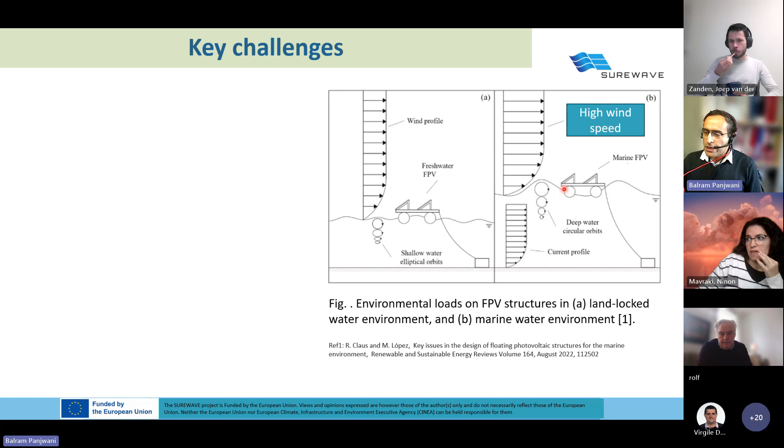You have extreme environmental events, constant fatigue on the joints and connections, salt water corrosion and UV degradation, biofouling, and this constant movement of the FPV modules and the breakwater could result in micro cracking and misalignment. Also, since these technologies are at low TRL, there are normally no well-established design standards, guidelines, and legal regulations.

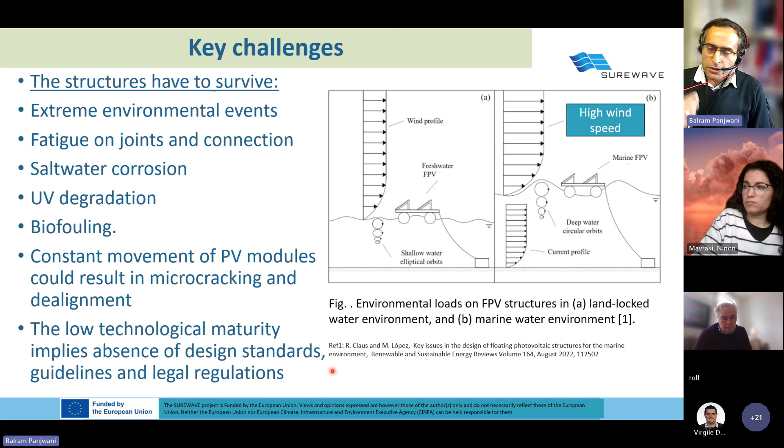So to address some of these key challenges, the SUREWAVE project aims to design an FPV system that can withstand wind of 25 meters per second, waves of 14 meters, and current of 1.2 meters per second.

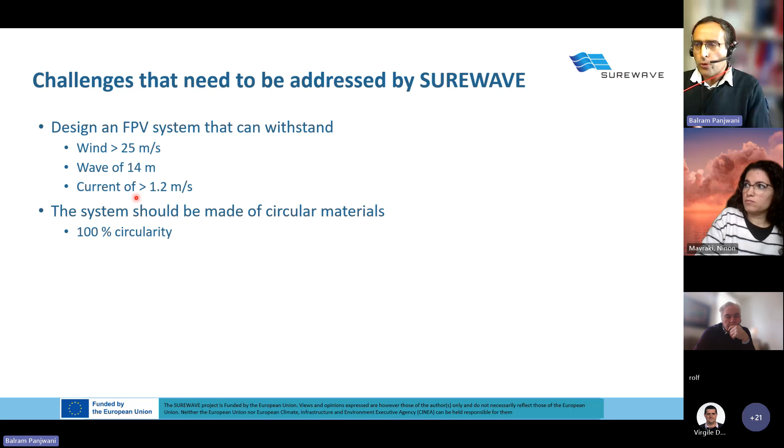Since today there's a lot of focus on sustainable material, our goal is also to bring new materials that are close to 100% circular. That's one of the key goals of the SUREWAVE project. At the same time we want improved service life. And since we're developing a new concept, we'd like to perform assessments to check CO2 footprints, how this system affects marine life, and how we can reduce the levelized cost of energy production.

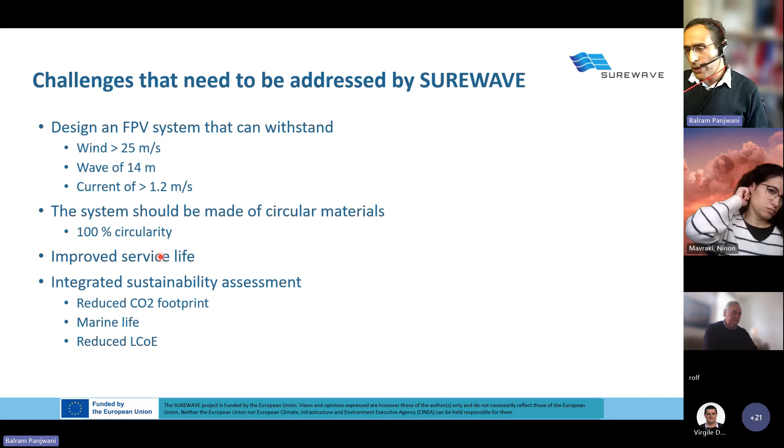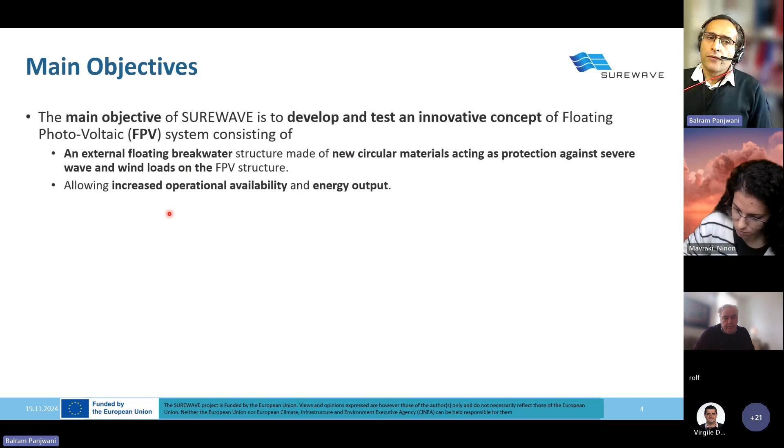Considering levelized cost of energy, the main objective of the SUREWAVE project is to develop and test an innovative concept of a floating FPV system consisting of an external floating breakwater made of new circular material, which will act against severe wave and wind loads on the FPV structure itself, allowing increased operational availability and energy output.

So the idea is to have a floating breakwater in front of the FPV. The main goal of this breakwater is to protect against the severe, mainly short waves, which are critical to the internal FPV. So this breakwater will protect the internal FPV.

More details, calculations, and simulations will be performed by Thomas in his presentation. The goal is that when it comes to long period waves, normally the entire system will float, but the breakwater will attenuate or mostly remove some of these critical waves which are dangerous to the FPV.

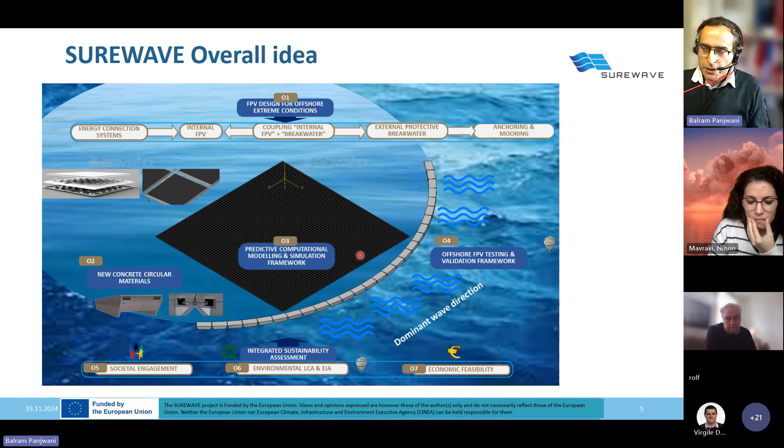Just to show this concept, we have made one video which we would like to show here.

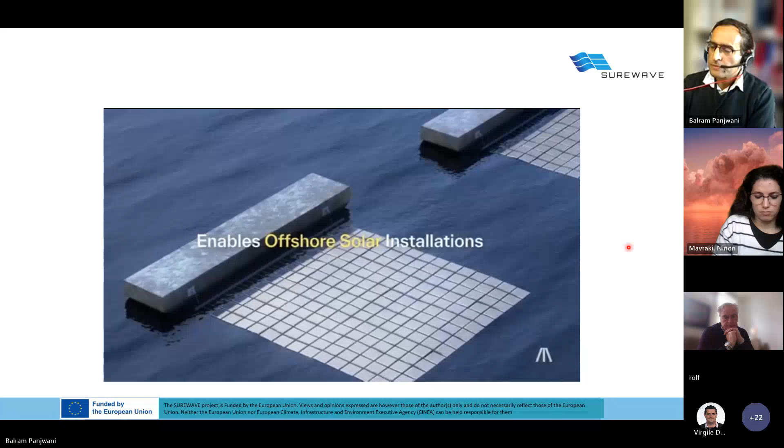This was a short video of the SUREWAVE overall concept, but within this project we have multiple key research pillars.

The first research pillar is to come up with an innovative breakwater concept. The second is to introduce sustainable material into this breakwater. And since these systems are designed for a very complex environment, we would like to bring in some intelligent predictive modeling tools.

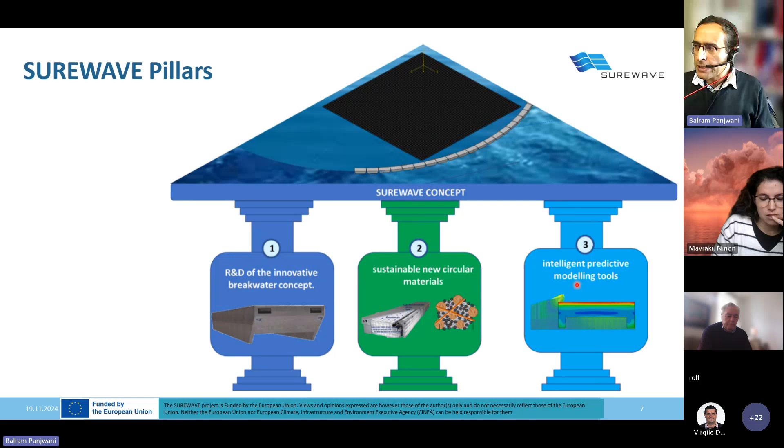When it comes to design, we considered which environmental conditions to take into account. The locations we chose include both mild and harsh environments, considering different wave directionalities and location, with wind higher than 25 meters per second, current of 1.2, and wave height of 14 meters.

So what we found was 3 different locations, starting with the Baltic Sea, which is a mild condition. These are some of the wave and wind parameters here.

We have the Western Mediterranean, which is again mild but with different wave and wind parameters. And then we took one extreme or harsh condition, which we took in the greater North Sea region.

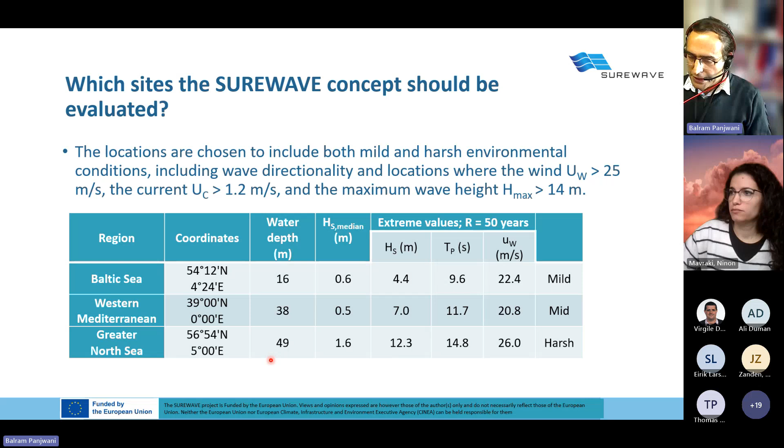Once we identified the locations, we started looking into the key objectives of the SUREWAVE project. The first one is a novel floating PV design for offshore extreme conditions.

In this case, we would like to work on this novel breakwater concept, which will help protect and attenuate the wind, waves, and current that are harmful to the internal FPV elements.

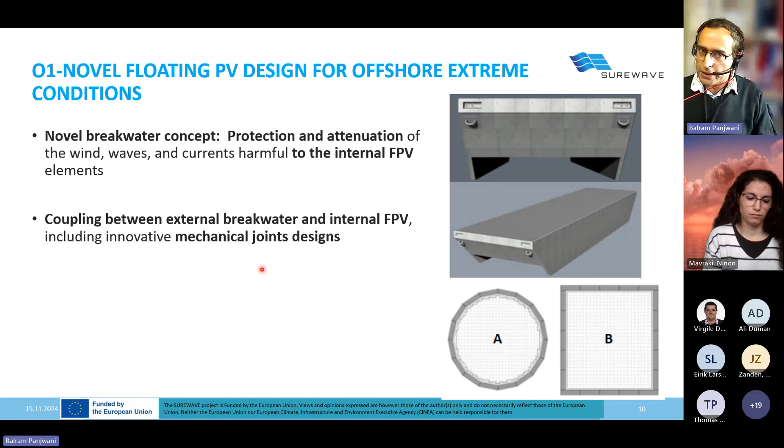We would like to develop a coupling between the breakwater and the internal FPV, which will also include innovative mechanical joint design. Another aspect is to look into the anchoring and mooring of the complete system.

The most important aspect was how to do the layout optimization, whether we should take circular, rectangular shapes - there are multiple parameters to be considered.

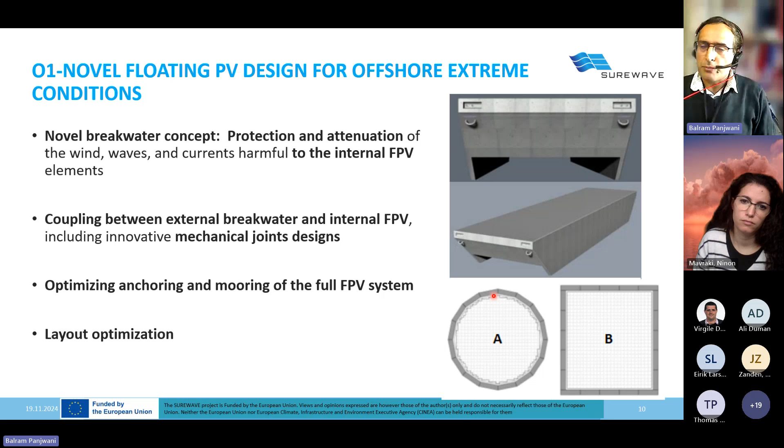When it comes to the internal FPV, in this case we have chosen a concept from Sunlit Sea, although the concept proposed by SUREWAVE is generic and could be applied to any land-locked FPV system. But there are a few reasons why we chose this concept.

One is that the concept is built on marine grade aluminum, which is more or less 100% circular material, is easy to install and deploy, and has a reduced cost.

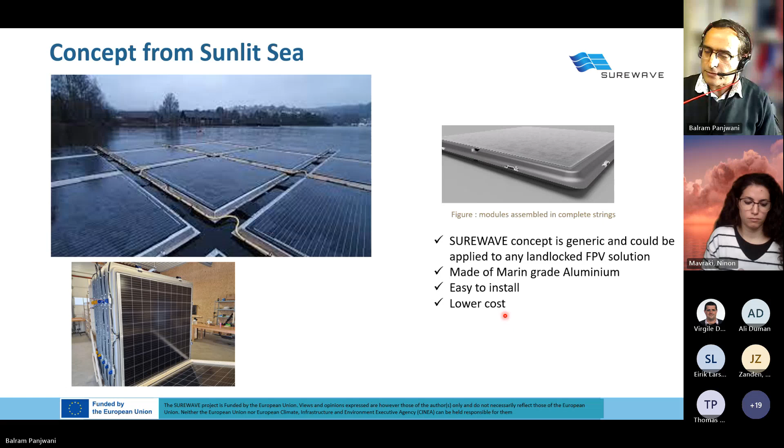When it comes to the breakwater, we have been considering various parameters in the design, like width, length, height, shape, with or without keel, under various sea states. This is a schematic showing how the wave comes, and the breakwater protects the internal PV from this wave condition.

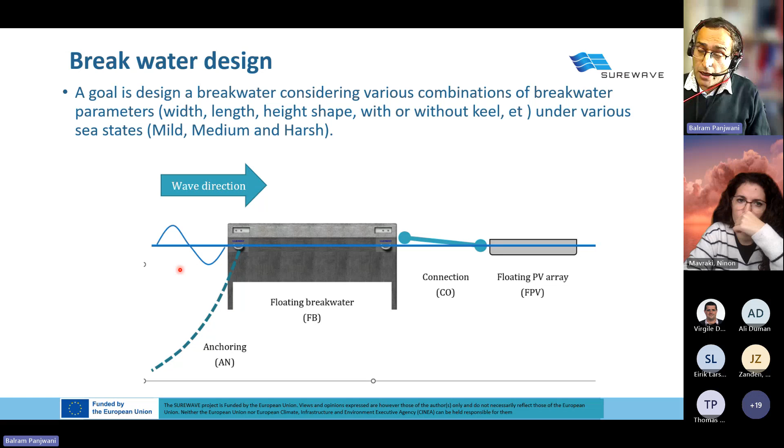More discussion will be presented by Thomas in the next presentation. Under this objective 1, we are basically analyzing different layouts, starting from circular, polygon, triangle, and oval shapes.

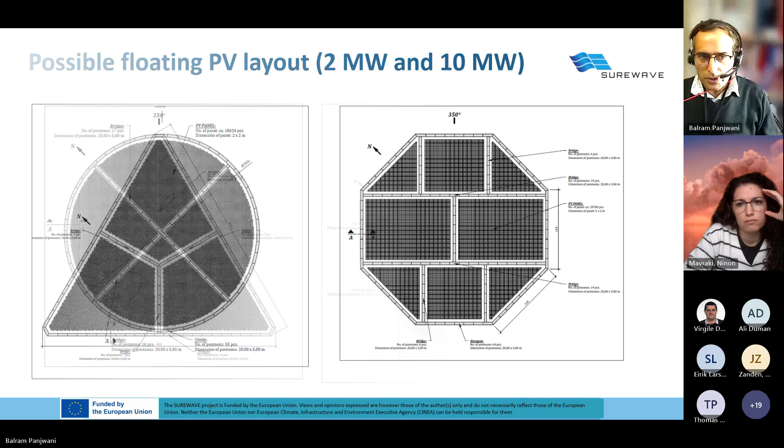In this case, we have made a very complex matrix. On one axis we have different shapes, and on the other axis we have various parameters. We created a matrix giving the plus and minus on each parameter, to see which design or layout is the most optimum.

So the detailed result will be presented by Thomas.

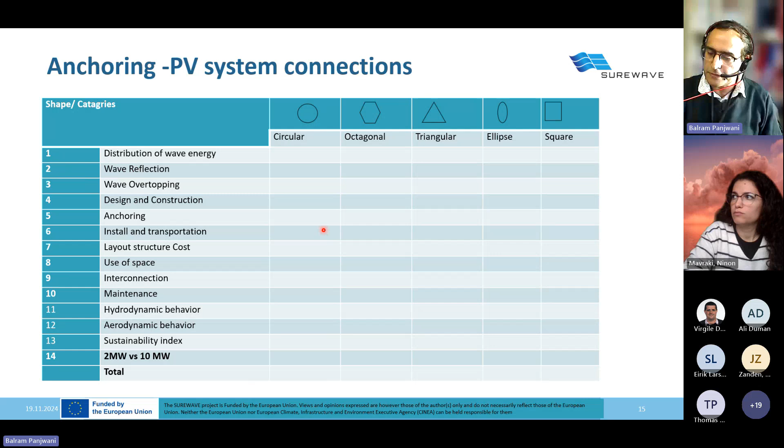Once we have designed the breakwater, the second objective was to introduce sustainable materials in this breakwater. Today most breakwaters use traditional concrete, and this concrete consists of large amounts of cement, which is one of the CO2 emitters.

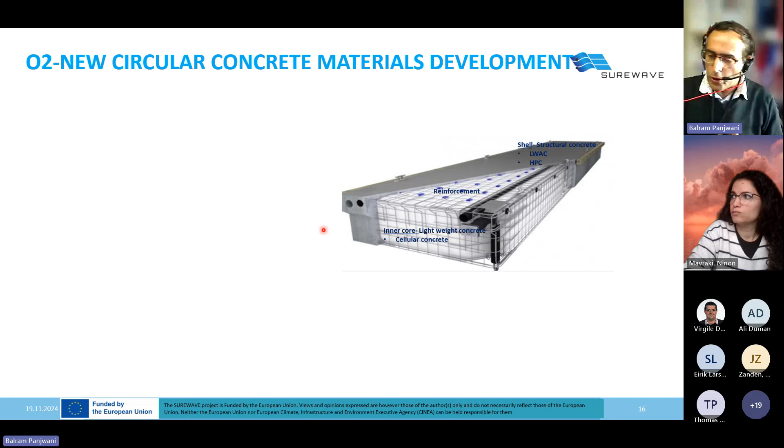So our goal is to come up with a new circular concrete for this structural element, including high performance concrete and lightweight aggregate concrete based on circular materials.

Also, today most breakwaters are designed using EPS, which is a form of plastic that is not good for marine life. So as part of SUREWAVE, we are introducing a new cellular material made from a circular composition, in order to reduce CO2 as well as have less impact on marine life, because we are not using plastic in this concept.

At the end, we would like to do some material durability assessment through corrosion, biofouling testing, and resistance. With this, we are proposing a lightweight solution with reduced production and installation cost, that should be easy to cast and transport.

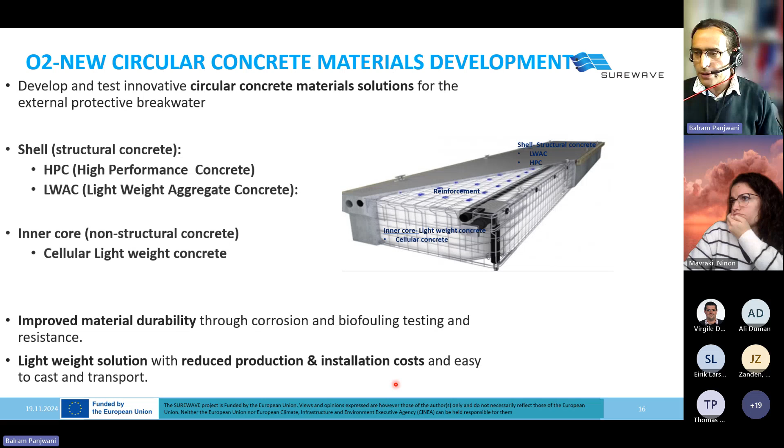In this case, we have explored multiple solutions with respect to choice of material, taking different recycled glass, lightweight aggregate, recycled concrete aggregate, slags, fly ash, and other waste streams. So we are basically taking different raw materials.

Since it's a new material, we'd like to see whether it fits the offshore conditions or not. So we'll do a lot of measurement with respect to compressive strength, density, mechanical, physical, and other durability property assessment, as part of this SUREWAVE project.

You can see we have different samples, and each sample we are making, and then sending to the lab to do all this assessment.

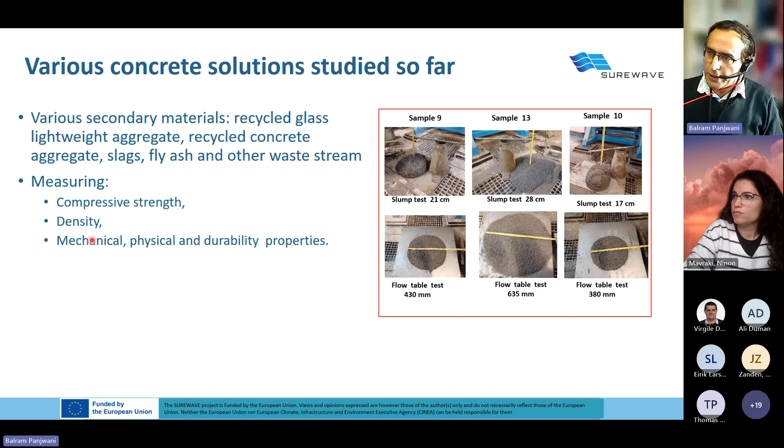Since this project has quite many connections and systems, we would like to come up with a new predictive computational modeling and simulation framework. First, we have this coupled aero-hydrodynamic modeling tool, which will be utilized to understand the motion and loading prediction of the complete FPV system.

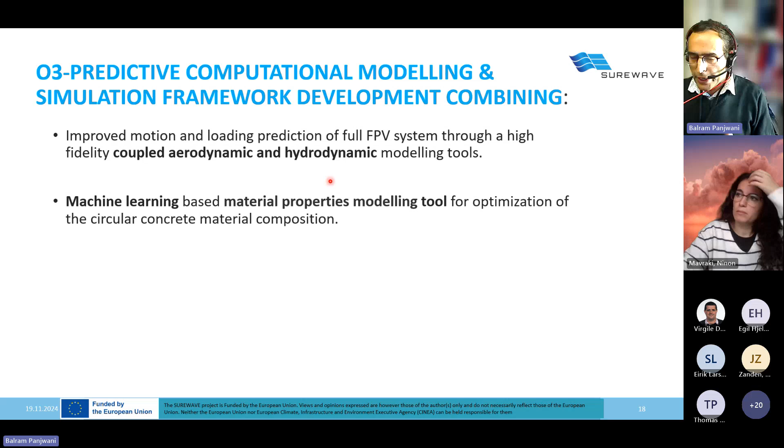Second, we are developing a machine learning based material property modeling tool for finding the optimum concrete material composition. And at the end, we are bringing a structural integrity modeling tool, used to assess the remaining lifetime of the component or other material and structural properties.

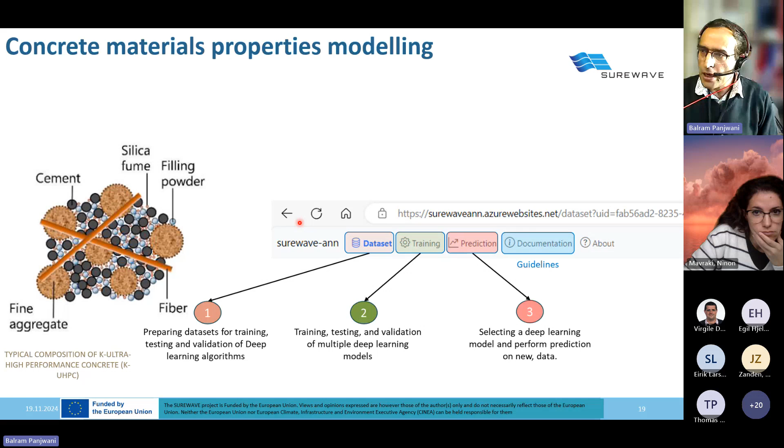When it comes to this materials modeling tool, it's a very innovative concept. In this case, we are building a large database considering various compositions of this concrete mixture.

Normally the concrete consists of cement, fine aggregates, coarse aggregates, and filling powders. So we built a database with the concrete properties. Then using this database, first we train the model, and then we use this trained model to predict the material property behavior, and document all our results.

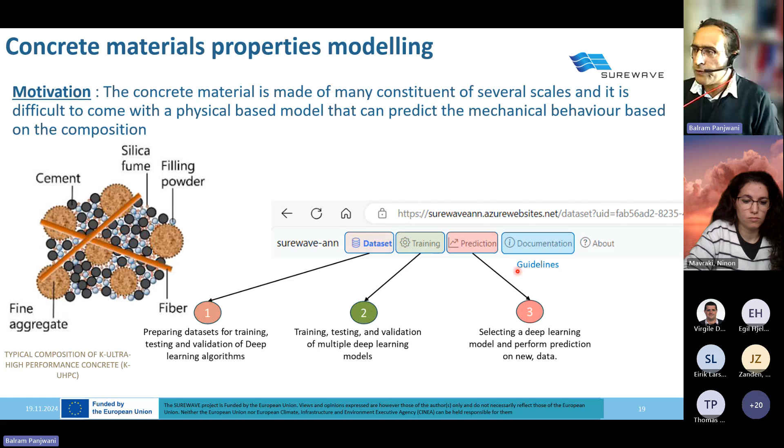When it comes to this structural health management system, it's one of the very complex tools we are developing here. In this case, we are doing aerodynamic and hydrodynamic assessment.

Once we have that, in parallel we have the materials modeling tool, and we have the structural integrity modeling using the finite element technique. These are the numerical models, from low fidelity to high fidelity.

So we'll be producing a lot of data sets from there. Then we have the monitoring system, with corrosion sensors and force sensors, and we take the database from there. By combining all these numerical models with data from the experiments, we are building this structural health management system.

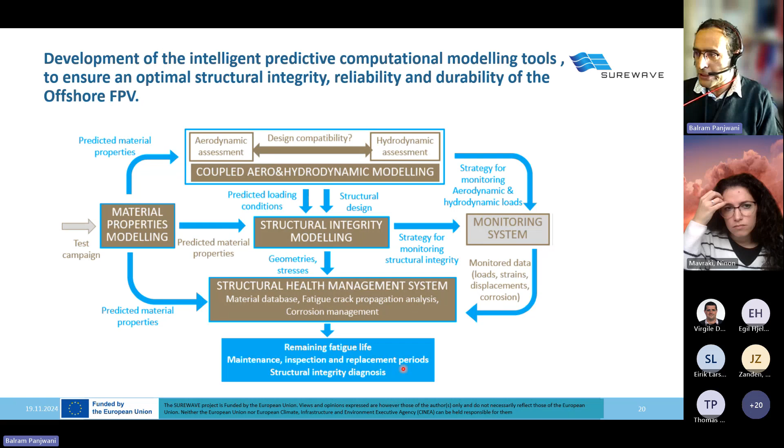The goal is to estimate the remaining fatigue lifetime, to be used in maintenance, inspections, and replacement periods, and to perform other structural integrity diagnosis.

So once we have gone from the breakwater to the sustainable material to the numerical tools, since we are developing a different kind of elements here, our goal basically is to assess the different components using the lab facility.

As you see, this complete FPV system consists of very complex connections. Based on our study, we found that there are a few connections that are among the weakest in the entire system. So in this case, we'll be doing some structural assessment, like the connection between the breakwaters, and between the breakwaters and solar modules, and connection between solar module to solar module.

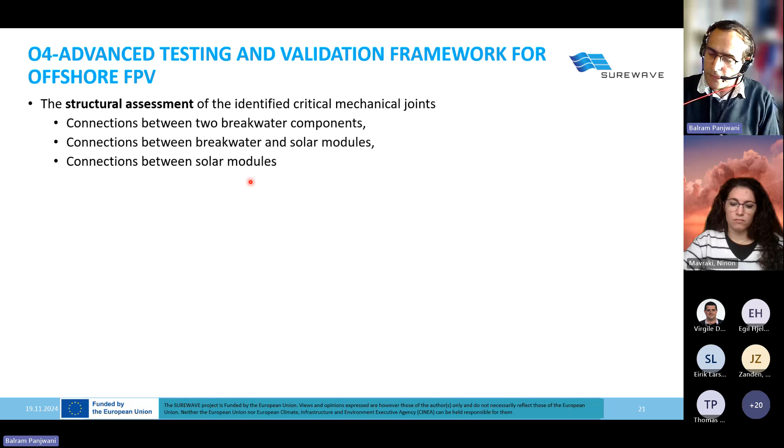In addition to that, we are also doing some basin tests, mainly using the Marine Advanced Facility at 1/10th scale. And then at the end, we also do the long-term behavior testing of this concrete breakwater prototype.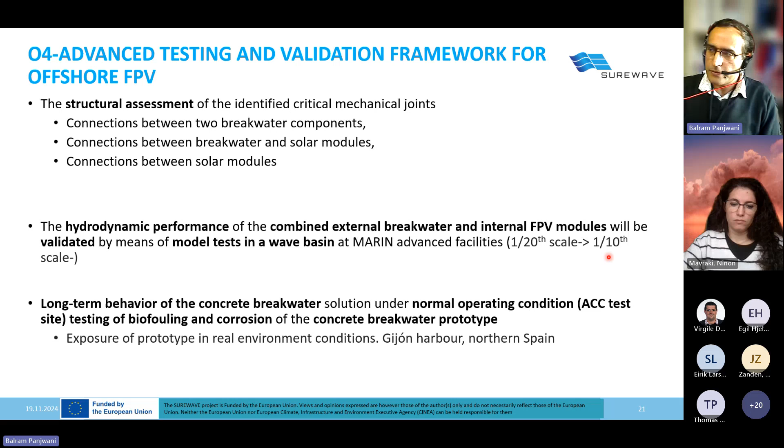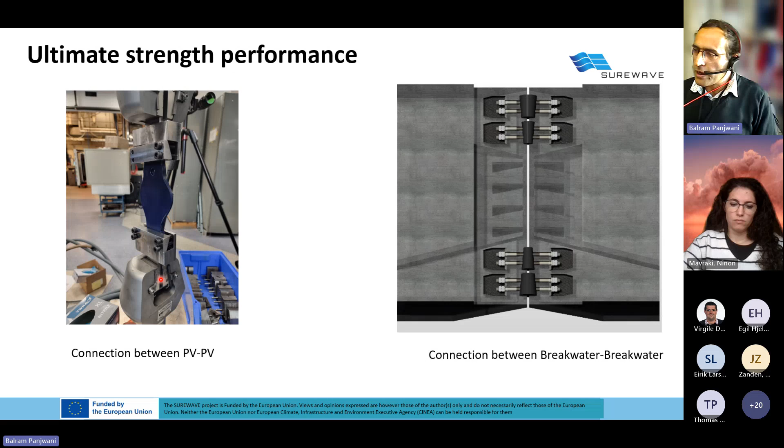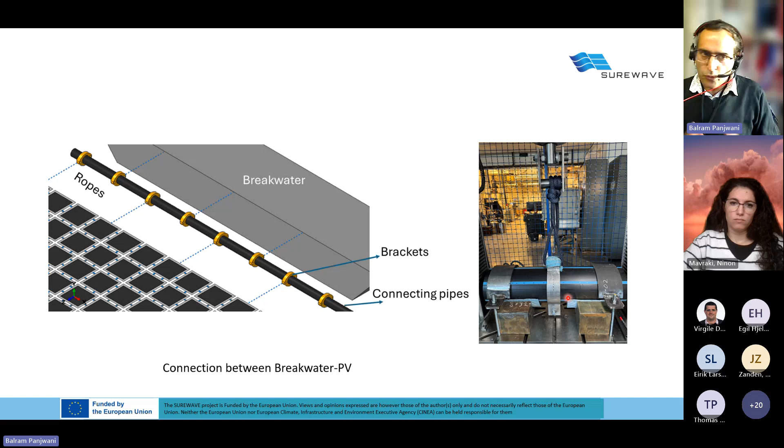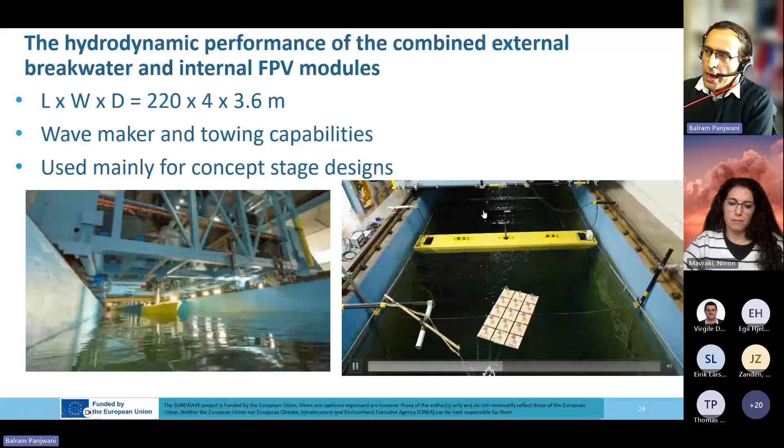Once we have this concept available, we are basically analyzing, as you can see in the picture, we have done our first set of wave tank experiments using the MARIN facility. So here we have this PV matrix and the breakwater, and we are basically understanding the behavior under different wave conditions. Normally the first set of database is available, and primarily we are using this database to validate our numerical models.

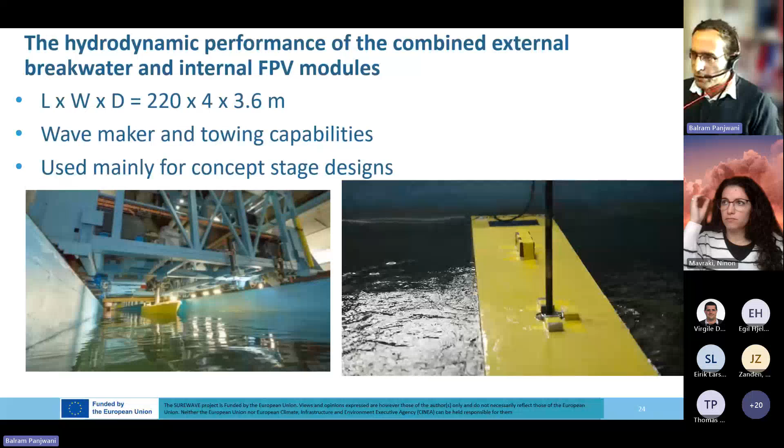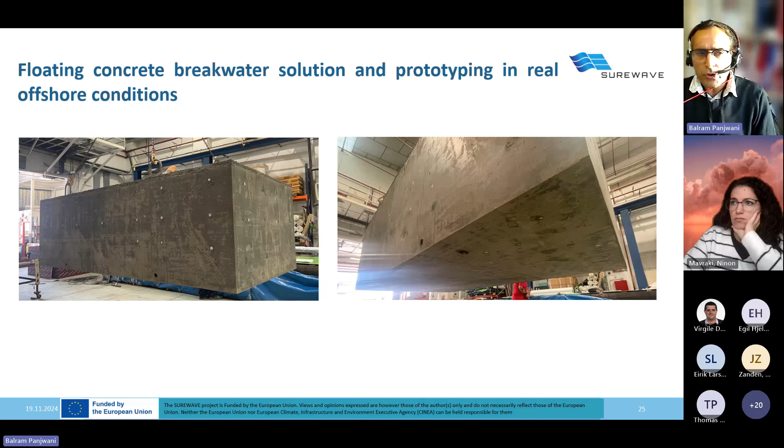So now this is coming to my last slide of this presentation. The main key takeaway from the SUREWAVE project: we are building this floating PV solution, mainly to work in the North Sea environment. And then we are building a floating breakwater module, which is made of circular and sustainable material.

We'll be making a machine learning model to predict the concrete properties. And then we validate this concept through lab testing, hydrodynamic assessment, concrete lab testing, and concrete prototype testing. At the end, we will do the techno-economic assessment of the full concept.

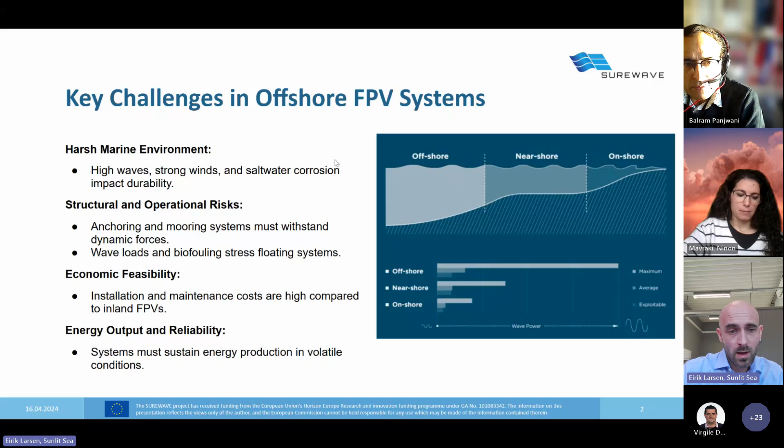Our role in the SUREWAVE project is that we have operated these advanced wave breakers. Oh sorry, I skipped a slide.

About Sunlit Sea's solution, what we have is a durable design. We have aluminum floaters that have high structural integrity, and we have laminated the solar panels on top of this floater.

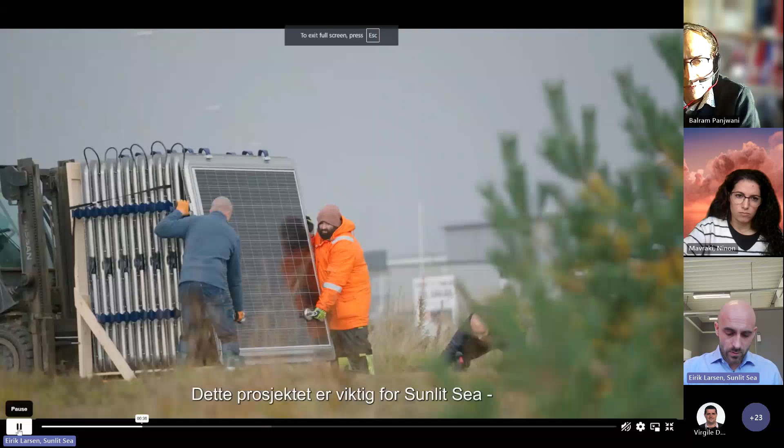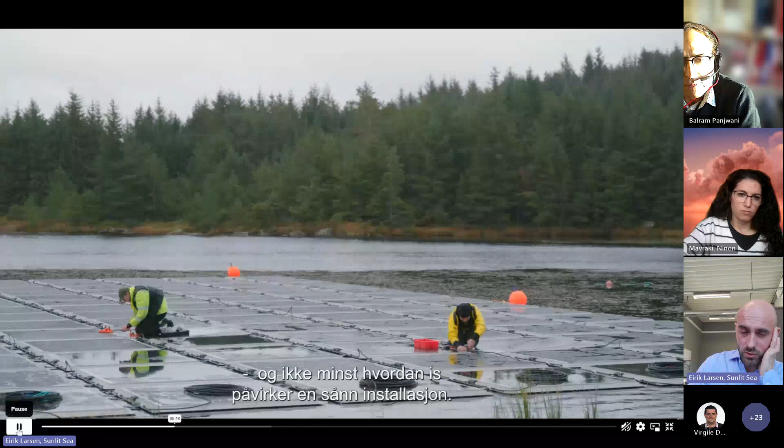In case you haven't seen it, I can show you a quick video about how it looks. If you can see my screen there, this is a project we did onshore actually. What you can see is these marine grade aluminum floaters resist corrosion and impact, and they give enhanced cooling, which is good because it gives you a higher energy yield.

They're pre-assembled, so it's a modular system that is pretty easy to install. We installed this whole installation in one day, actually, the one you saw.

It's also a configurable system, so you can lay it out in various configurations. For instance, you can have a square configuration, rectangular, or round, in a manner that Thomas will show you a little bit later.

Not the least, it's an eco-friendly approach. Aluminum does not have the same negative impact on the environment as microplastics and marine disruption.

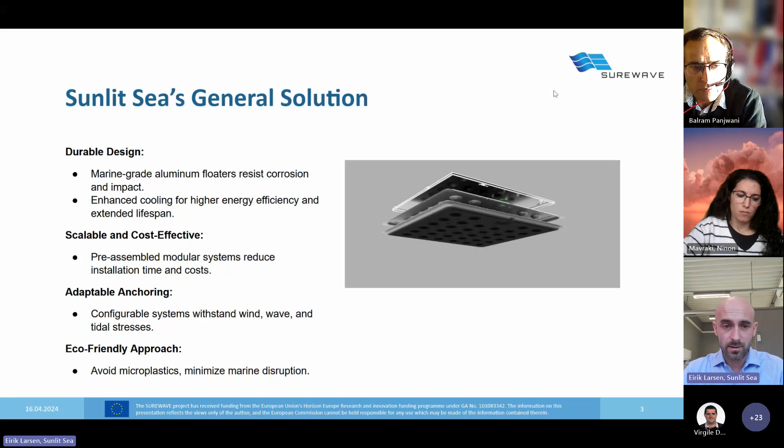Also, maybe not that important, but it's visually appealing. I mention that because there's a lot of resistance, especially in Norway, towards floating wind due to the visual appearance and the sound it makes. This system is completely flat, and you can barely see it from afar.

Our role in the SUREWAVE project for Sunlit Sea is that we've collaborated with Clement and the other partners to develop these wave attenuation structures, which are the wave breakers, but also the mooring systems that connect the wave breakers with the floating solar system. I will show figures of this in Thomas' presentation.

We've been collaborating with the partners to perform testing, and it's still ongoing, both in simulation, in wave tanks, and in offshore environments. This has given us data from real conditions that have been really useful to improve design and change, for instance, the hinges of our system.

We've been investigating eco-friendly materials, especially for the wave breakers, to minimize the environmental footprint.

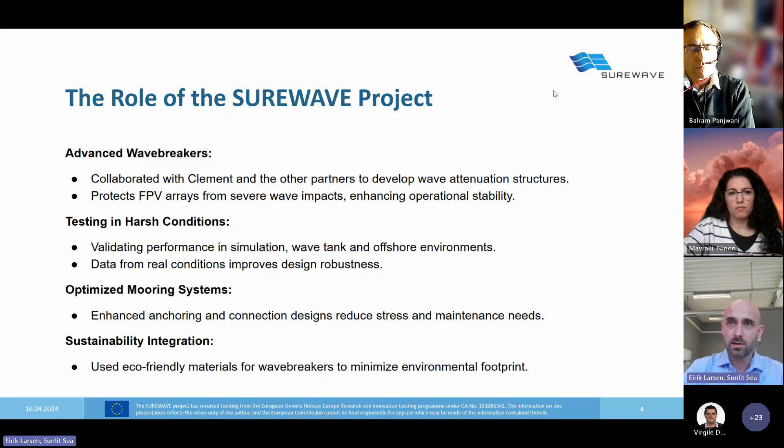The impact of this is that increased resilience can make a system last much longer in these conditions, which is important because it's expensive to install. For us as a company, it can give us access to open sea and nearshore conditions, which otherwise would be viewed as non-bankable.

We can get more energy output from the system by keeping the waves in check a little bit, so it's less wave-induced mismatch losses and less maintenance. Last of all, it's a long-term solution that is really scalable and really configurable.

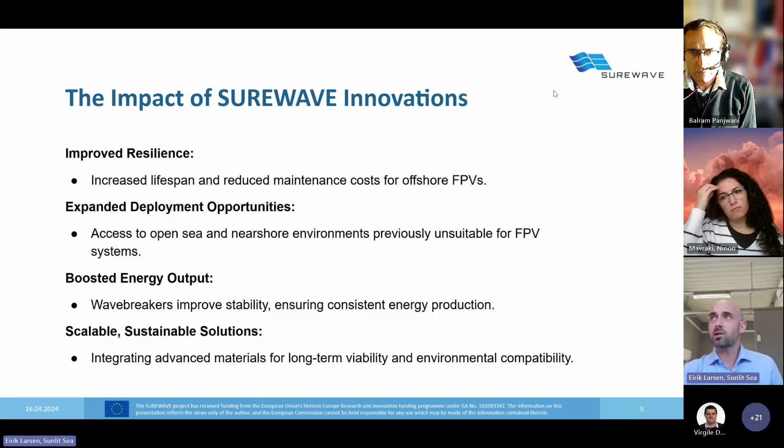Even though we're now considering only offshore conditions in this project, there's a lot of potential for investigating, for instance, wave protection from only one side of the system, or the most critical side regarding the wave loads.

Going forward, we are really looking forward to testing this in a real-world project. We have a real-world project that this is relevant to test on, and it will be very interesting to see, towards the end of the project, how the economic assessment of the whole system will be, because that's a really crucial part for us if we're going to prioritize these offshore conditions compared to other nearshore or on-land conditions.

That's all I wanted to talk about before giving the word over to Thomas, who is going to take you through the wave breaker design and give you some insights from his work. Thank you.

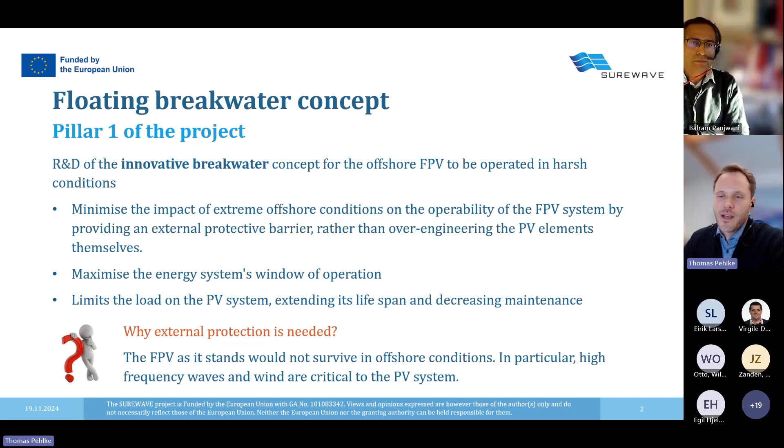Furthermore, the system is to be designed to generate electricity for an extended period of time, and the effects and loads on the PV system should be limited, thereby extending its service life and reducing the need for extensive maintenance. However, the primary reason for the external breakwater is that the floating solar system would be unable to withstand the extreme offshore conditions without protection. Especially high frequency waves are a significant risk.

What do we actually mean by extreme offshore conditions? For this European project, we have selected 3 locations with different conditions, including mild, moderate, and harsh. These selected sites are shown on the map. They have been assessed using statistical analysis based on hindcast data.

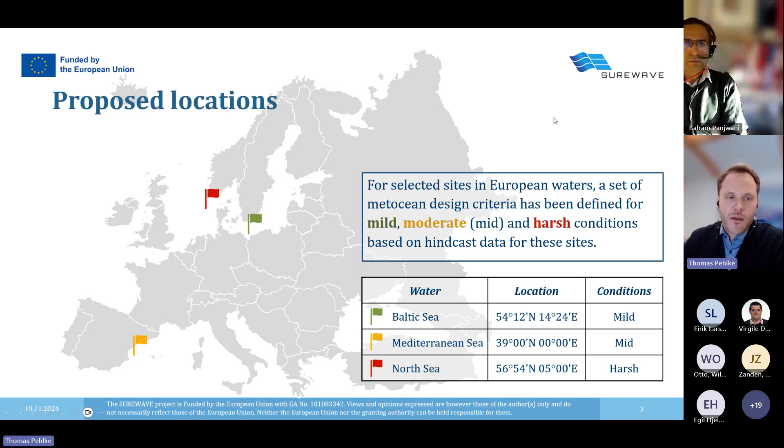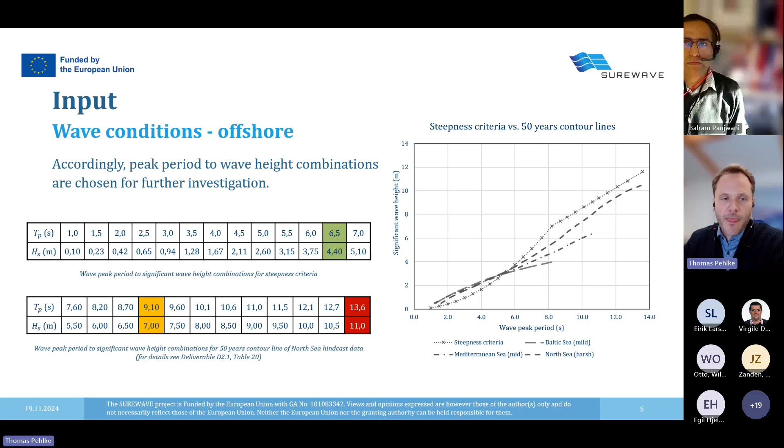Okay, let's get to the actual concept. As already mentioned, the idea is to arrange an outer breakwater ring with an internal floating PV system.

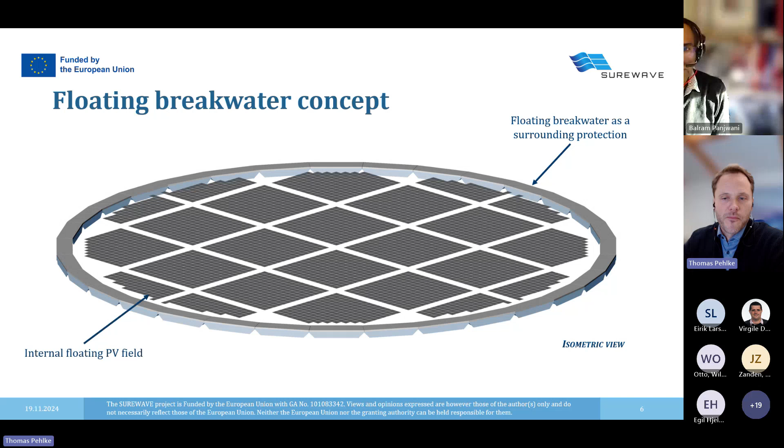The breakwater is comprised of individual trapezoidal modules, as seen from above here. This shape was selected to avoid production of rounded elements and to simplify the manufacturing process. Connections are incorporated between the elements to facilitate continuous force transfer. The selected circular layout shape has the advantage of minimizing force peaks and reducing the corresponding amount of material required.

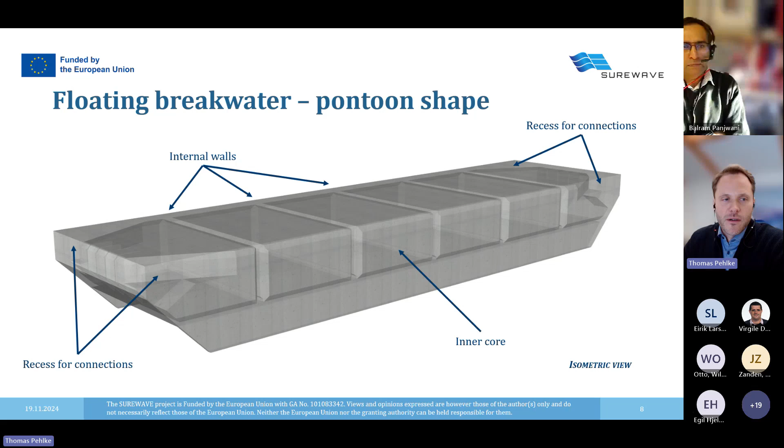This illustration shows a breakwater module in a slightly transparent manner. The element consists of a structured concrete shell on the outside and an inner core, which must be of light material so that the pontoon still floats. In the end, strengthening of the concrete is necessary to realize the force transfer from the connections. Internal walls are also arranged to strengthen the pontoon.

What materials are used? The second pillar of the project is the development of new sustainable materials with long-lasting properties. These materials are said to have a low environmental impact, but at the same time high corrosion and biofouling resistance. They are to contain recycled aggregates and replace cement at least partially with granulated blast furnace slag or fly ash.

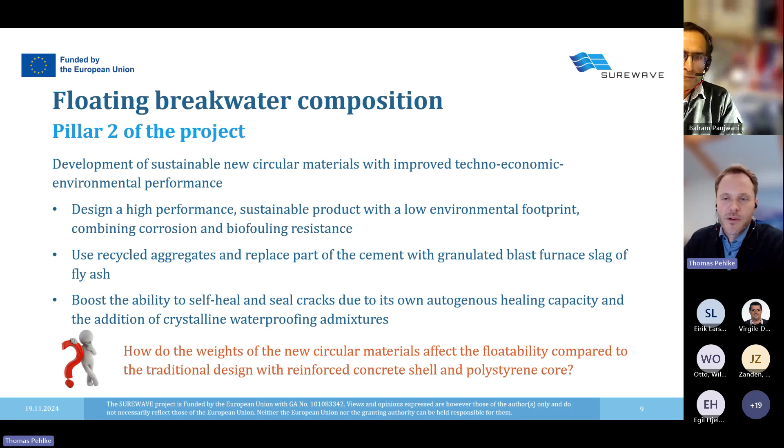But what is the influence of these new materials on the floating breakwater compared to the usual construction method with normal reinforced concrete as a shell and a very light polystyrene core? I will come to this on the next slides. So this is the typical cross-section of the breakwater: a lightweight core that is protected against external impact by the outer shell.

A variety of cross-sections with different widths and draft ratios were simulated using CFD software to obtain this preferred section, which was chosen for its good wave absorbing properties and the fact that it could still be produced and transported using conventional technology. Depending on the size of the diameter of the breakwater ring, the length of a single element is limited to a maximum length of 20 meters.

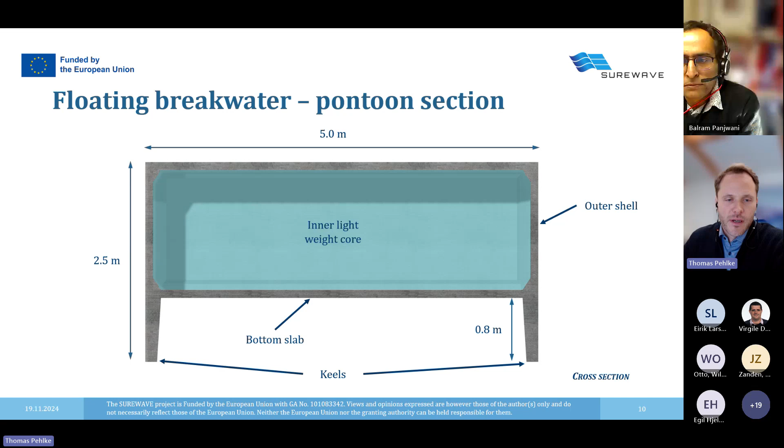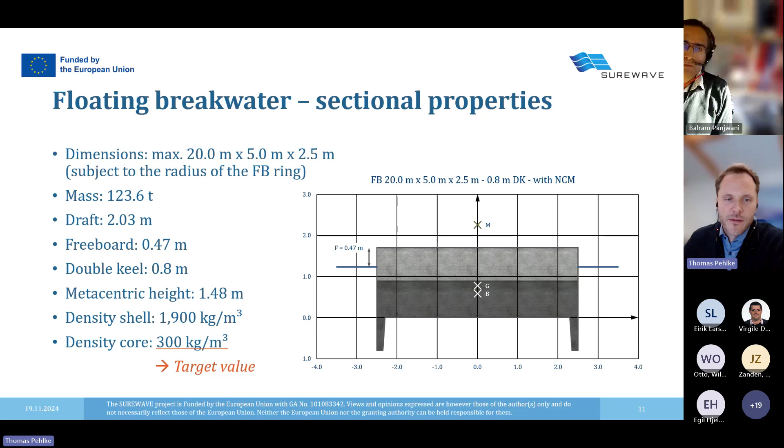The width is 5 meters and the height is 2.5 with 0.8 meter for the keels. The total weight of one element comes to approximately 124 tons. Initially we used 1.9 tons per cubic meter for the outer shell and 300 kg for the core, which was the target value of the material work package. In further assessment, these values will be adjusted to the actual results of the work package, which do not deviate significantly. The diagram indicates center of gravity and center of buoyancy and the metacentric height.

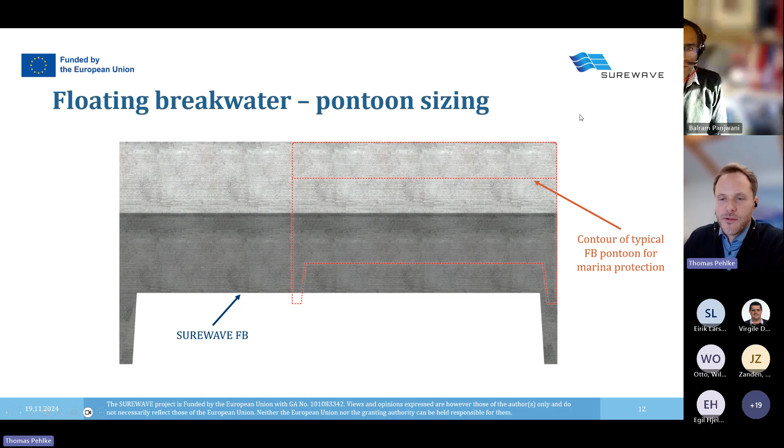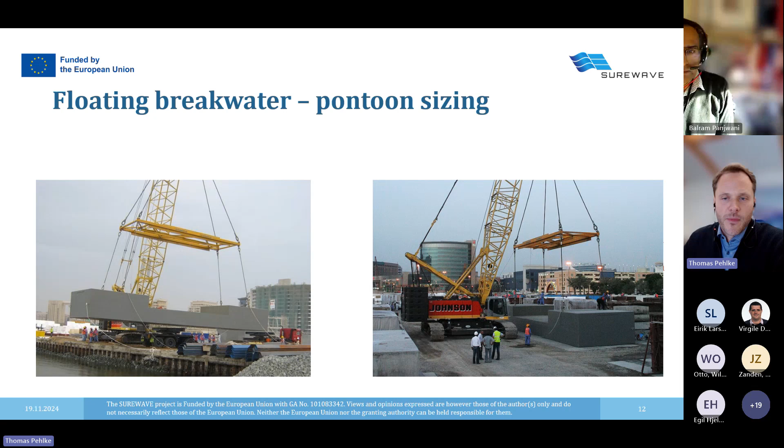As already mentioned, investigations were carried out to determine the wave breaking and wave damping behavior. One criterion is the transmission, which describes the proportion of wave energy that passes through the breakwater and still acts on the floating PV system.

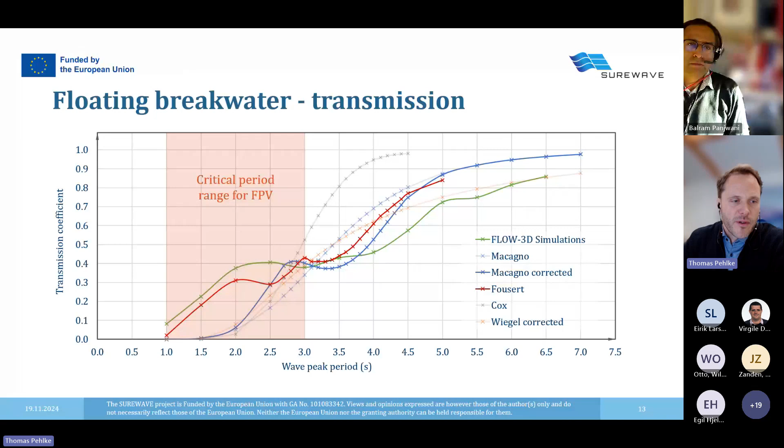Various methods were chosen for this assessment and the results are represented here. In the critical range for the floating PV system between 1 and 3 seconds wave period, the maximum transmission was determined to be 0.4.

This is an excerpt from the CFD simulations. It is evident that the waves behind the breakwater are less pronounced.

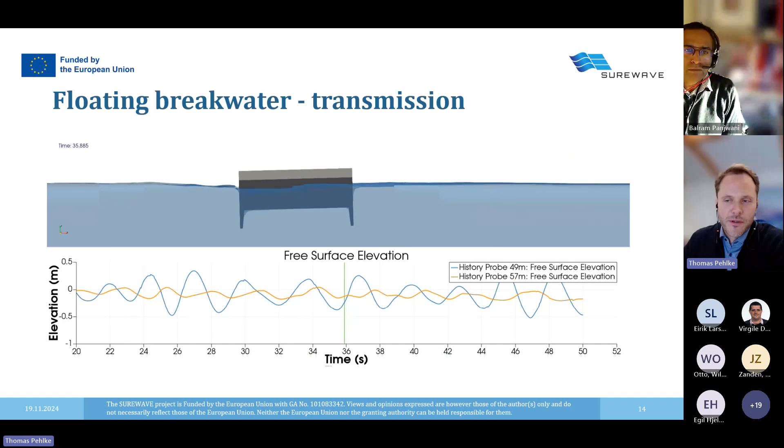It should be noted that this example does not consider any stabilizing effect of the ring or the anchoring, which will reduce the horizontal and roll movements. In order for the ring to provide the desired stability effect, it is essential that the load-bearing capacity of the connections between the elements is adequate. The connections are designed so that forces and moments are transferred in all directions except the moment around the y axis. Due to the significant cantilever lengths, a hinge solution was implemented here.

One component of the connection is a rubber buffer to absorb compression and shear forces. Furthermore, coupling ropes with threaded terminals are used to transfer the tension.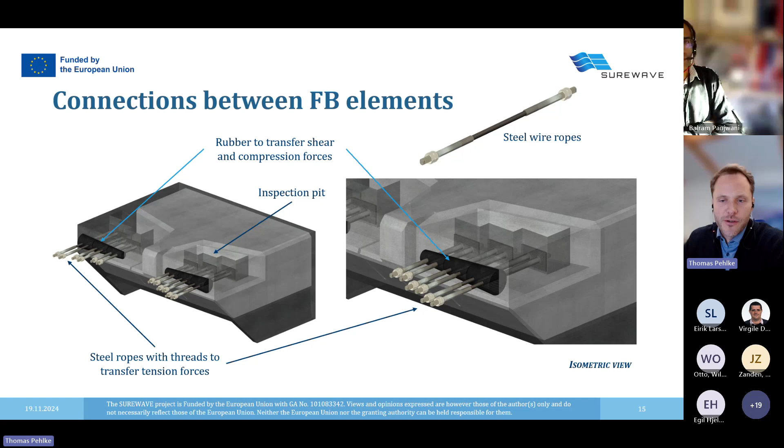The top view shows the mode of action of the connections when absorbing horizontal forces. This results in a pair of forces with compression and tension. And the section shows a load path for splitting forces on tension in the ropes.

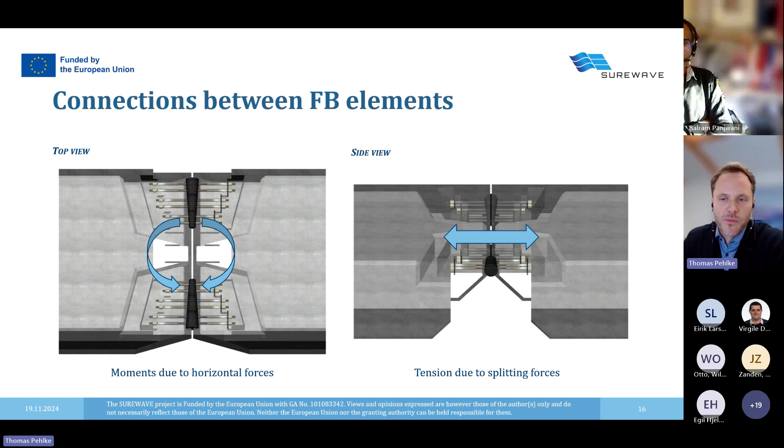Another component of the system is the anchoring, which is shown here in principle. After evaluating various advantages and disadvantages, anchoring with chains and driven anchor piles was chosen, also because this type of anchoring can still be used in deep water conditions.

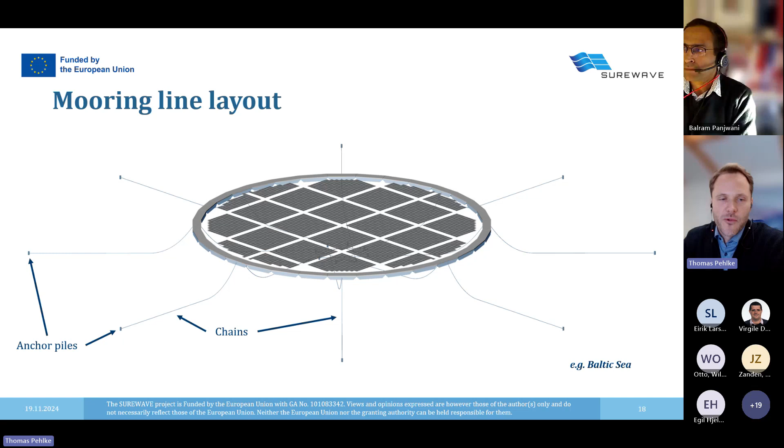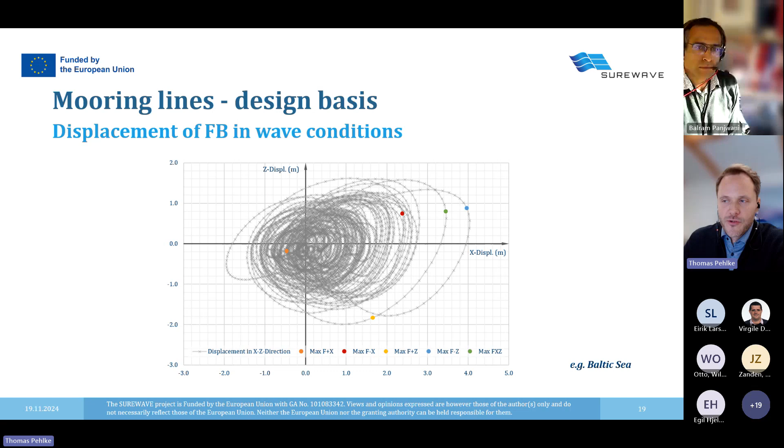In addition, the anchoring should not be too rigid so that the movement of the breakwater is not too restricted and the associated forces are not too great. This diagram shows the movement of a free-floating breakwater in extreme conditions. The point of reference is the center of gravity.

As mentioned, the length of the chains and the location of the anchor piles were chosen in a way that the movement of the breakwater is not limited and that there is still a horizontal load application at the anchor pile.

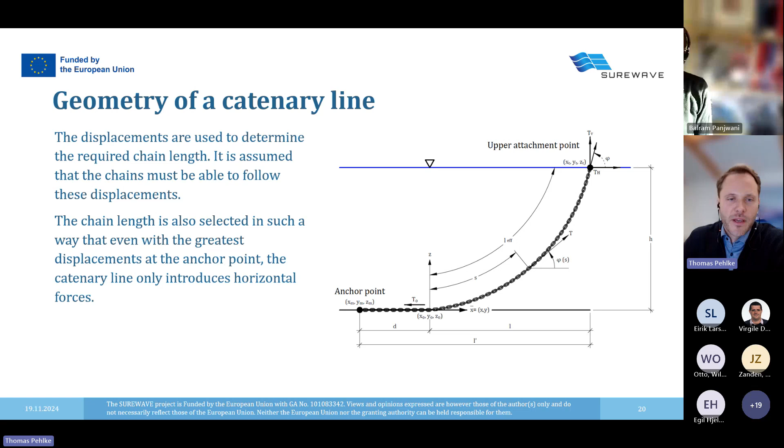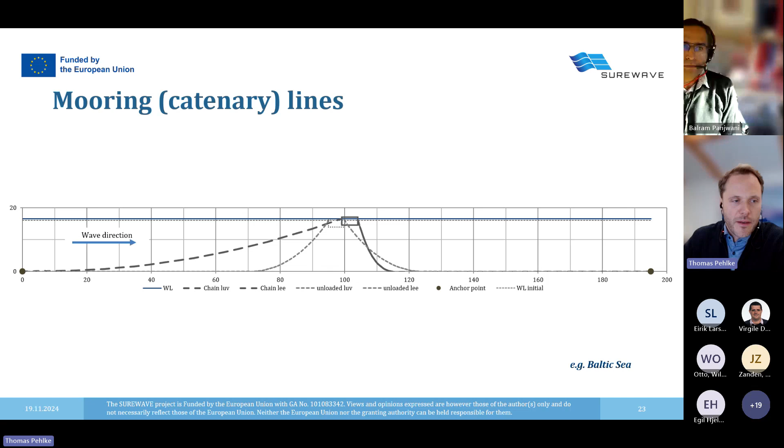In this graph, you can see the displaced system compared to the unloaded system. The same image, just slightly more enlarged. And here's a complete cross-section with 2 anchor points. So even at maximum displacement, there's still a horizontal load application

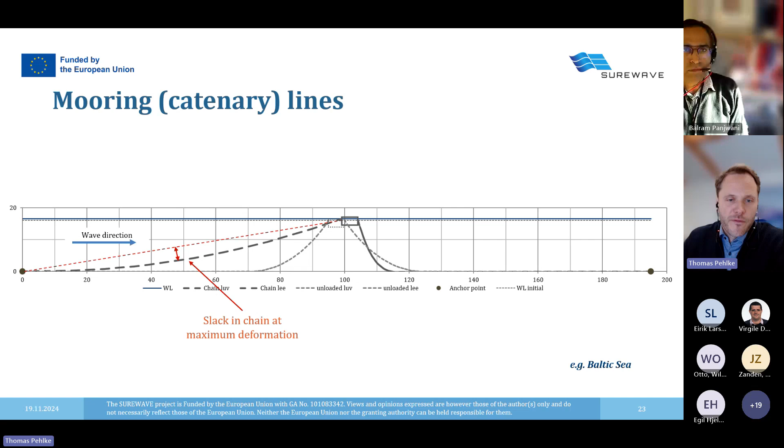in the anchor pile, and there is still slack in the chain. Accordingly, the movement of the breakwater is not blocked. This is just an example of the location in the Baltic Sea. The chain length and distance to the anchor pile, as well as the number of anchor piles, vary depending on the location.

So yeah, that's my last slide. Since the floating solar system does not have a separate anchoring, it must be connected to the breakwater ring. However, the PV field should not follow every movement of the breakwater. Therefore, an elastic connection with PP ropes between the components was chosen.

This already absorbs a large part of the various displacements through elastic extension. In addition, a transition element was arranged as a load distributor because the connection to the breakwater can be made in smaller numbers but with a larger diameter because a relatively large load transfer is possible.

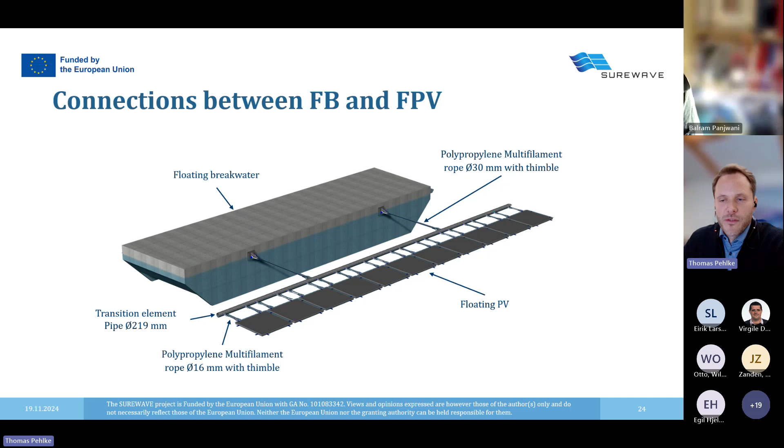The capacity on the floating PV system is lower, so connections must be used in larger numbers but in smaller diameters. As mentioned already by Balram, SINTEF has tested these joints for load-bearing capacity and durability so that we can assume they are sufficiently strong during the expected lifespan.

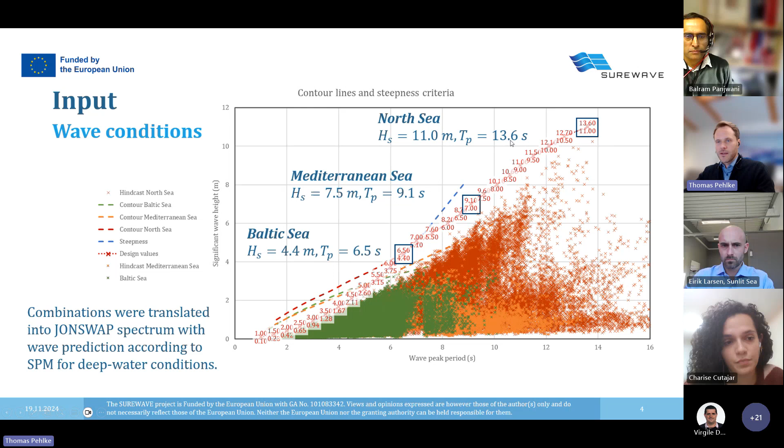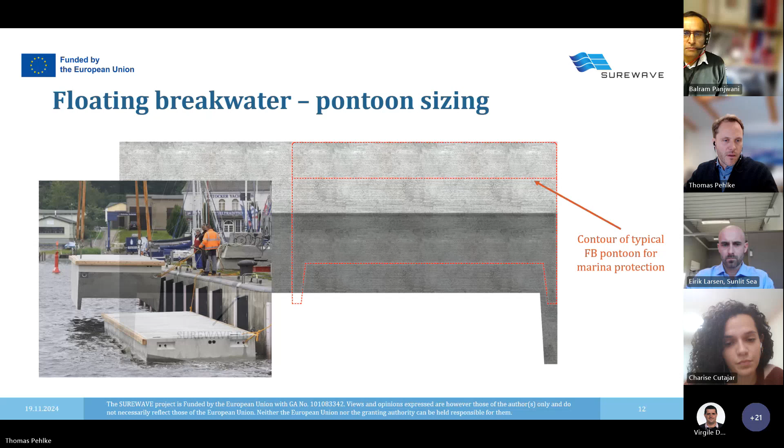The reason for these three locations was that we have different conditions: mild conditions in the Baltic Sea with maximum values of peak period of 6.5 seconds and significant wave height of 4.4 meters. And as you see, in the North Sea we have peak periods up to 13.6 seconds maximum, and corresponding significant wave height here was 11 meters. So we made simulations with all these values just to see what is the behavior in different wave conditions, and in the end to find out - coming to that diagram - what is the behavior with these peak periods. But let's say in the end, at 7 seconds period, there's no effect of the breakwater at all. So even if you make the width double, 10 meters for example, there wouldn't be an effect because the pontoon is too light compared to the load of the waves.

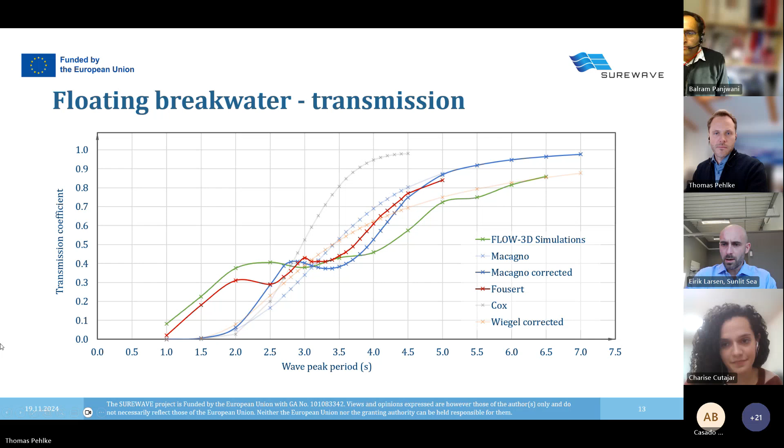How about use of pre-stressing to have thinner and lighter outer structural concrete? Is it possible? Yeah, generally yes, but pre-stress is one thing. Of course you can apply higher loads in the reinforcement, but on the other hand you also need the compressive zone. So just to make it thinner is one thing, but you need a certain location where you have these pre-stressed elements, the pre-stressed reinforcement, and we also wanted to have a certain weight of the breakwater. So just to make it lighter wouldn't help - it might use less materials, but on the other hand it would affect the floating behavior and the transmission. So we are quite good with the weight that we have now. And I believe the production process for pre-stress would be more costly compared to just unstressed reinforcement.